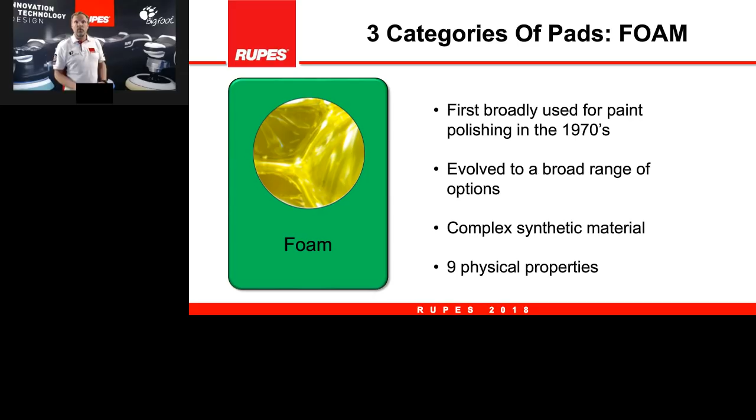In fact, these foam formulas that are used for polishing paint have 9 physical properties. These properties don't always apply to other uses of foam, for example, seat cushions and filters and things like that. But for technical polishing foams, there are about 9 physical properties that make up the formula. Those 9 properties are on your screen now, and we'll go through these real quickly.

The first one is porosity, and that is the little air bubbles, the cells in the foam, and that is porosity. Pores per inch is a unit of measure for foam, and that is literally counting cells in a certain area. So porosity can be more or less in these foam formulas. Next is density, and that's how many of these cells exist in a certain area, and how thick those cell walls are. Next is tear resistance, and this is the ability of the foam formula to withstand a stretch.

So it's an industry test actually on foam, very, very standardized test, but it's a way of stretching foam and then understanding the tear point when it begins to tear. We also have elasticity, and that's obviously how stretchy, how much the foam stretches out. And then also stiffness, so that's how stiff the foam is.

And then there's a property called load deflection. Load deflection is the force at which, when you compress foam, the foam pushes back. That is called load deflection. And there's several different industry tests for that in foam.

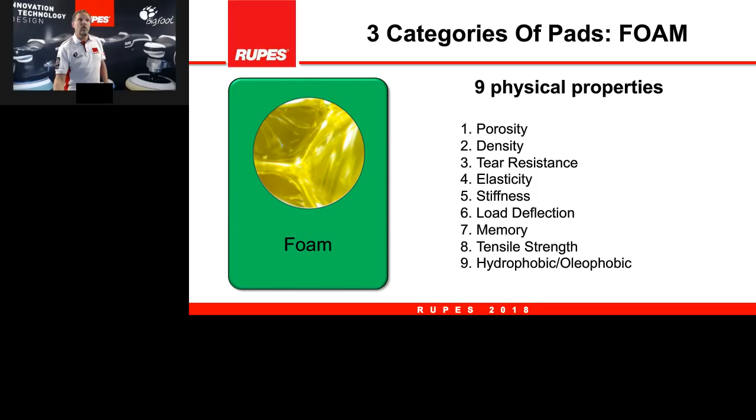So with that, we will go on to what happens on the surface. So when we use a polishing pad and we put it to paint, what is going on in between the foam and the paint? Well, the first thing is that the way the foam is structured, we have this pushing and pulling of the abrasives across the paint surface. And that is because the abrasives get into the cells and they hold there, and then they get pushed around on the surface.

So fluids actually go through foam in a hydraulic motion. And basically what that means is when you compress foam, the fluids that are in your compound and polish can actually get pushed through from one cell to the next cell. So when you compress foam and there's fluid on here, it will get pushed through those cells. And then also when you release, there's a hydraulic effect and the fluids move through the cells.

So foam has a surface area like all these polishing materials do, and the surface area is generally less on a foam pad than it would be on microfiber, but foam would be slightly more than wool. And what we mean by surface area is the actual touch points of the pad material to the paint surface. So this is what we call surface area, the surface contact of the pad to the paint surface.

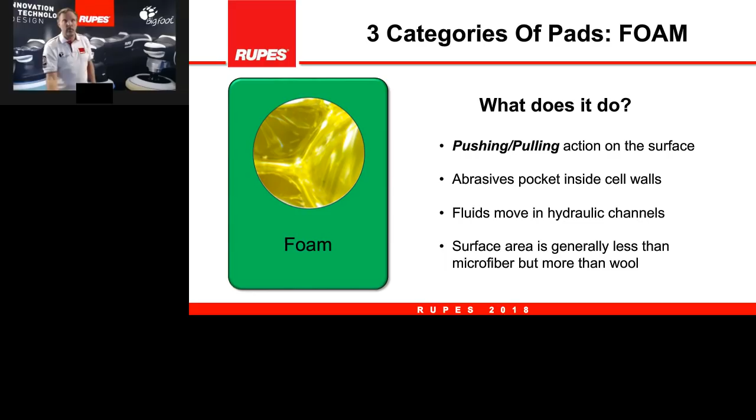So with that, we want to talk about this other property in foam, and that is called reticulation. The common words used are open and closed cell. So that means the cell walls are either completely intact and closed, or the reticulation process actually blows out one of those cell walls in every cell, and that opens up that cell. So that is called open cell foam.

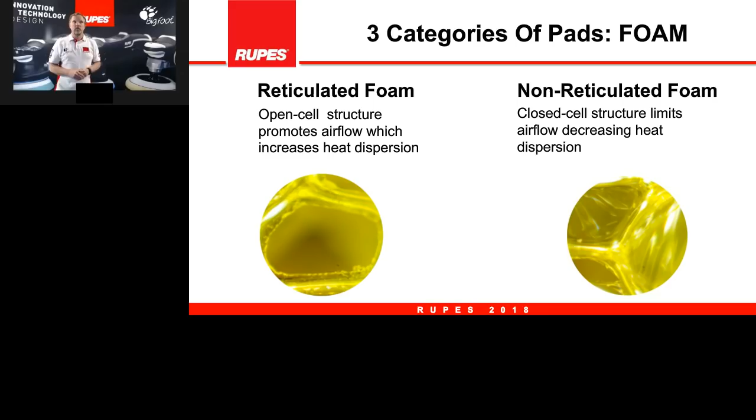And in the RUPES product line, all of the foams we use purposely are open cell foams. And one of the main reasons is this characteristic about airflow. So with open cell foams, you have this ability to allow air to migrate in and out of those cells more freely. And the closed cell foams tend to restrict that flow a little bit. And that means that the temperature could be higher in those pads. And with our tools, with the movements we have, we just chose open cell foams.

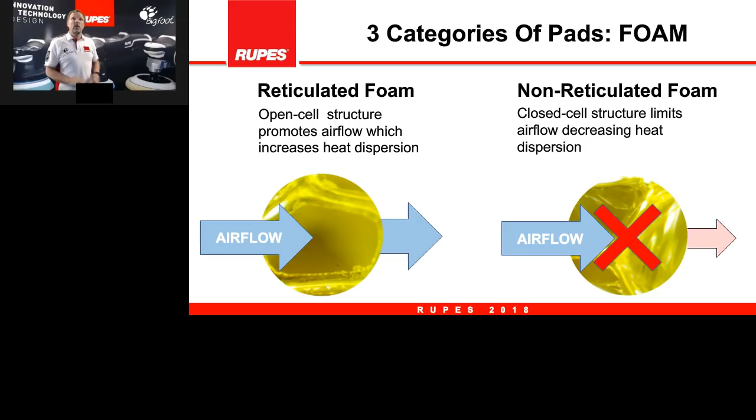So in our product line, we have 4 different levels of foam. And this is in our BigFoot Random Orbital product line. And these 4 levels represent different levels of aggressiveness and different levels of finishing for the foam. And there is blue, green, yellow, and white colored. And those colors correspond to the different levels of foam that we have.

One of the other physical properties that we have put into our foam pad products is this concept that we call lateral stability. So the lateral stability is the ability of that foam to maintain its structure with a side-to-side motion. And some of these traditional foams, perhaps the foams that were made for Rotary, the other foams that are on the market, they may not have this lateral stability built into the product.

And if that is the case, that foam pad on our tools could possibly generate more heat because a lot of the energy of the tool gets lost in the movement going side to side in an orbital movement.

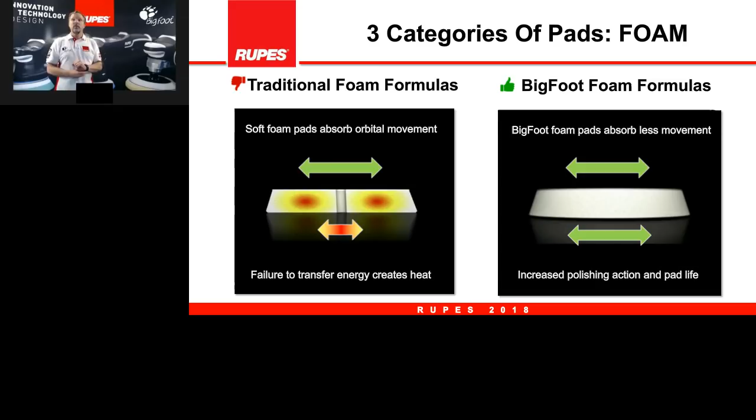The next thing we want to say about foam is that foams can absorb compound and polish, and sometimes too much. As users, we want to be mindful of this, what we call saturation. We want to make sure the foam pad does not get saturated too deep into the foam with compound, because especially on the random orbital tools, as they move with their large orbit, that heavily saturated compound in the pad could actually throw off the balancing movement of the tool. It can generate more internal heat inside the foam, and it could also create more pad drag on the surface because of that heavily loaded compound on the pad.

So the message here is pay attention to saturation. Make sure that you're not hosing on too much compound on the pads as you use them, because this saturation is not your friend. It's not helping you with performance.

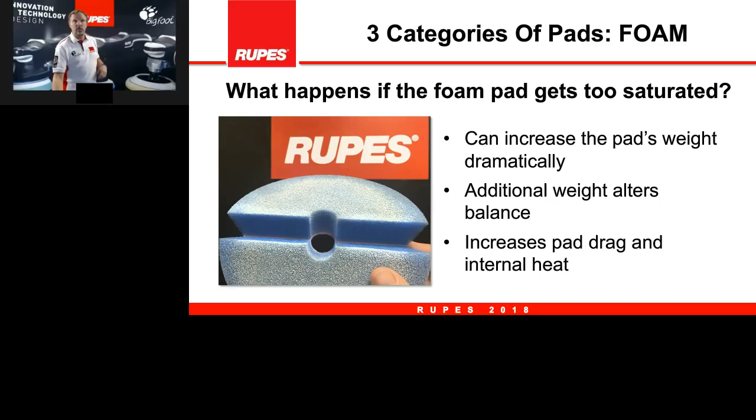And good for you that RUPES, in our tool design, in our movements, in our foam, and in our compounds, we've done everything we could to try and mitigate this saturation from happening, so it's actually part of our system.

The other thing we could say about our foams is that we have 3 complete different foam pad systems. There is the foam pads that are in our random orbital system, which many of you are familiar with. Then we have the foam pads that are in the Mille gear-driven orbital system, and you'll notice those are actually a completely different shape, with a completely different design. As well, the rotary foam pads are yet a 3rd new design.

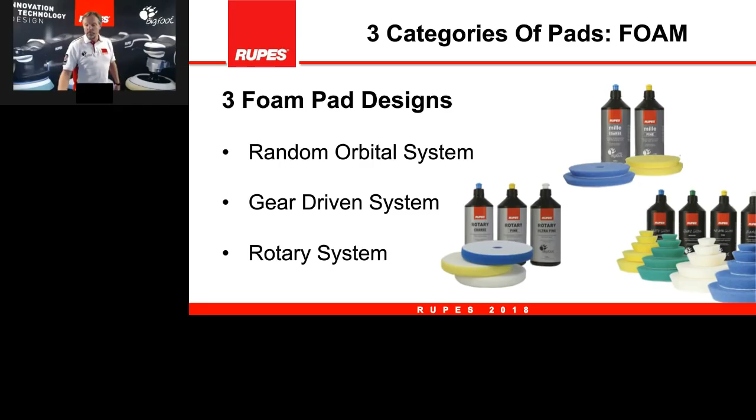These pads, if you put them all 3 side by side, they visually appear similar in the foam type, but the reality is that they have a different design, a different shape, and potentially different actual foam formulas based on these different movements and these different tools. So it's not just one foam fits all. We have different foam formulas for different tools and even different purposes.

With that, we want to talk about priming foam pads, and the recommendation here is to put 1 to 6 pea-sized dots of compound on the pad. We say 1 to 6 because it really depends on the pad diameter: 1 to 2 dots for the small foams, and maybe up to 4 or 5 pea-sized dots of compound for the 7-inch foam pad for the 21 millimeter tools.

So you put that amount of compound down, you put the pad to paint, and then you pull the trigger and run the tool at a low speed setting, like speed setting 2 or lower, but the point is a low speed setting, and you run it stationary in one place for about 30 seconds. The purpose of this 30 seconds of stationary running of the tool is to warm up the foam and warm up the compound.

With that, it allows the compound to spread more easily across the foam surface, and it actually activates your suspension system in the foam. So once it warms up, it won't be as stiff and it can actually suspend. This priming is important that you do this first before you begin your applications on the car, because you'll get better performance that way.

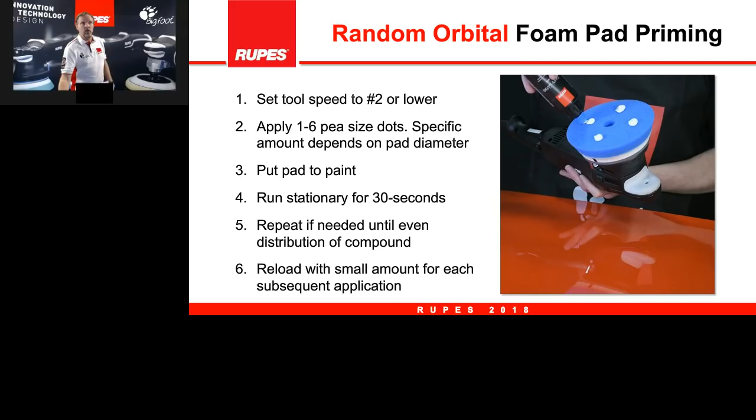Next, priming the foam pads for the Miele gear-driven polishing system. It's a little bit different on these pads. We are recommending you put a bead of product in an X pattern on the foam pad instead of pea-sized dots. Now, why not the dots? Well, if you put pea-sized dots on this tool with this particular predictable movement, the chances of it spreading and migrating throughout the whole pad, it will take a lot longer. So it's important that you get compound on the whole radius of the pad, because any dry parts of the pad with this system is going to cause pad drag.

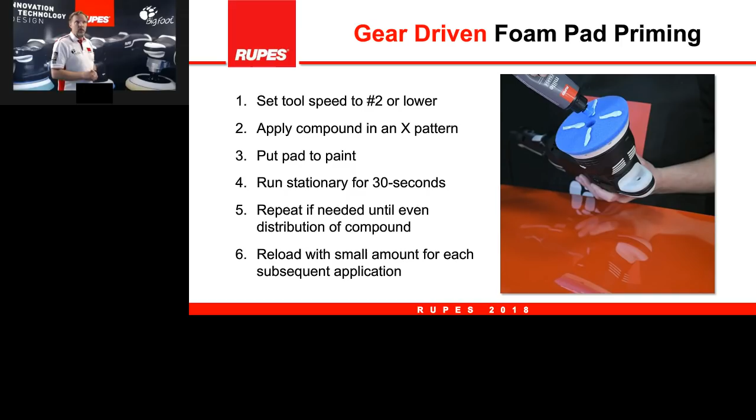So we put an X of compound, put the pad to paint, run the tool for 30 seconds in a stationary position, and that will prime the pads for the Mille gear-driven system. Next, we will go into priming for rotary, and the rotary movement is a completely different movement than the gear-driven and the random orbital.

And if we did dots or X's with this rotational movement, what would happen is any product that we place on this pad, as soon as we pull the trigger, that product will get thrown across the room. So any product, especially on the outside of the pad, as we turn on that tool, it's just going to sling.

So we need to be creative about how to prime this pad without making a mess and slinging it all over the place. The way we do that is we call it picking up a bead. We put a line of compound on the paint surface, and that line will be about as long as the diameter of the pad that you're using. If it's a big pad or a small pad, whatever that diameter is, that's the length of the line of compound.

And then, very particular motion here, but you will go from your right to left. The reason is because the rotary will only go in one direction, it won't go the other way. So it has to be from your right to left. Otherwise, if you go from your left to right to pick up this bead, it will throw product away, but going from right to left, it will suck it down into the center of the pad. So this is how we do this.

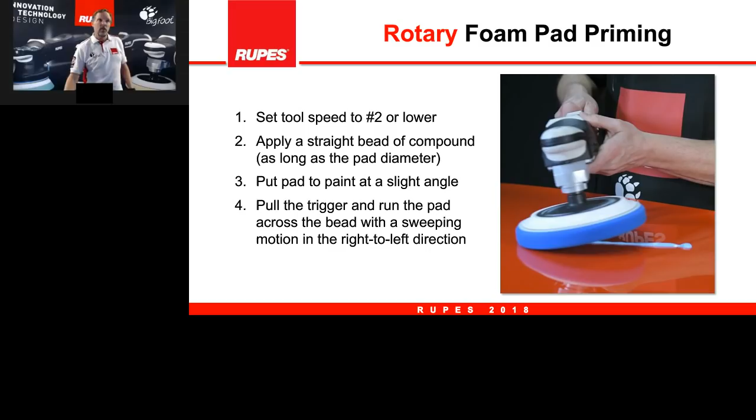We pull it across that bead, and then we lay the pad down flat and run the tool for about 15 seconds. The reload for rotary is the same. It's a very small amount of product, because once you're primed, you should be good to go. So 1, maybe 2 pea-sized dots to reload that pad after you're primed.

Cleaning foam pads, the recommendation is to use either compressed air or the RUPES BigFoot Claw pad cleaning brush, or a nylon bristle brush, some kind of a pad cleaning brush. Those are 2 very popular ways. The compressed air will be more efficient and more effective. So if you have the ability to do compressed air, that is really the best way to clean foam pads as you're working on the car.

So with that, we have discussed foam as a material category. That's the first of 3. I'm going to kick this over to Milan, Italy, and Fabrizio will talk about the next material, which is microfiber.

Yes, thank you, Jason. Thank you.

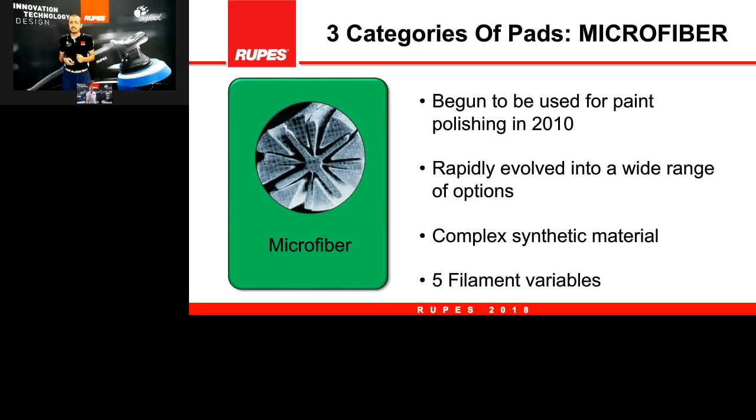So we have 5 possible variables that we can change, and these variables are the thickness of the microfiber. It's a microfiber, so for sure it's a very small thickness, but we can change it a little bit. The pile length, of course - we have a blue and a yellow, we will see it in a minute, with different pile length. We have a different ratio, polyester, polyamide - these are the 2 main components.

If you see in the picture, one of the 2 materials is polyester, the other one is polyamide. And changing this ratio, we can change the hydrophobicity or hydrophilicity. So we can change the behavior and the ability to take out water or grease or dirt. Number of vertical slits and strand density, so how many fibers we have in a square inch.

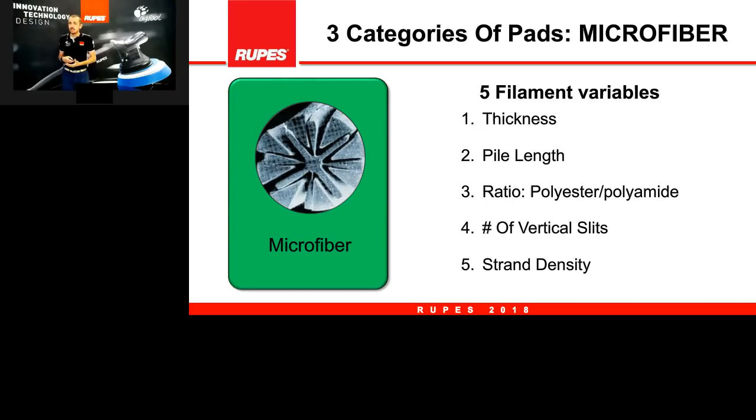Changing this, we can change the behavior of the microfiber, but what happens is that what the microfiber does on the surface is slicing. It just cuts out pieces of material from the surface. The abrasive will remain attached to the fiber. Fluids will hold on to fibers. So what we normally say is that it grabs and holds material from the surface.

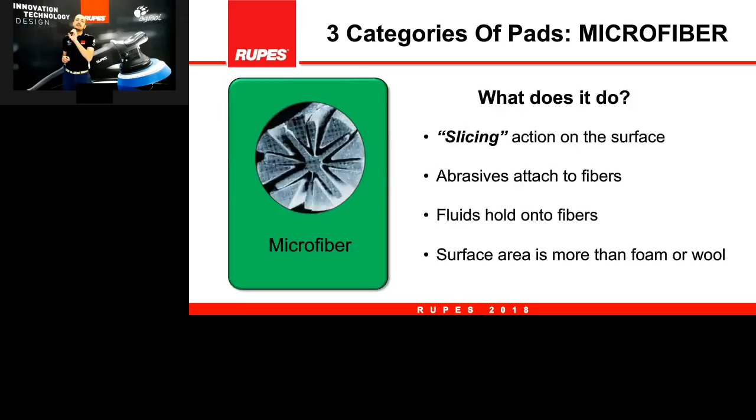The reason why this kind of material is more aggressive than foam is that the surface area working is higher. So we have a lot of surface in contact with the paint, and we can take out material quite fast, quite rapidly. So this is the mechanism, how it works.

While a normal natural fiber, can be wool, can be linen, can be any fiber, cotton for example, will just move dirt from one place to another one, microfiber will capture, will take it, will grab and hold this material. So it will just not be there on the surface anymore after that.

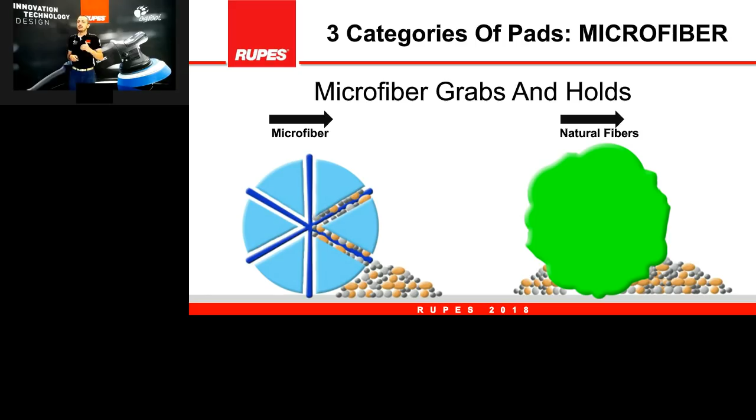It is a split fiber, meaning 70-80% polyester and 20-30% polyamide, and we can change this ratio. This gives us the possibility to change the features and the behavior of this material. It is a blended material, the blending of these two components.

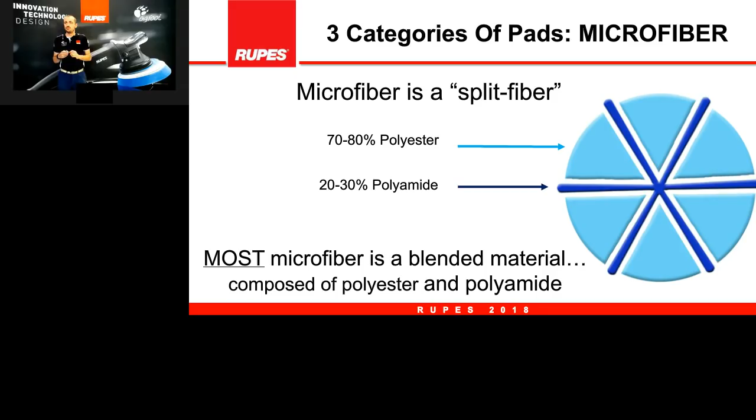What is interesting, and the reason why it appeared on the market only a few years ago, is that there is a high level of engineering behind the creation of microfiber. Look at this picture. On the left you see the thickness, an example of the ratio. The thickness of microfiber compared to the thickness of any regular natural fiber is the same ratio we have between a pencil and a big basketball, a regular basketball. So we have a material that is totally engineered and very advanced.

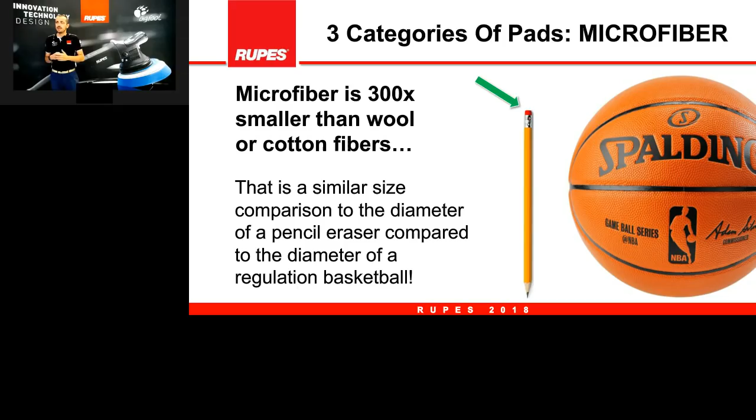This is the structure of the polyester, so this is the microfiber. We have the smaller filament, which is all connected to other filaments like them, giving a strand. These strands are bonded together to give a yarn, and this is knitted or woven to give the fabric. So in the end, what we have is a very complex structure, able to do a very peculiar job on the surface we are working on.

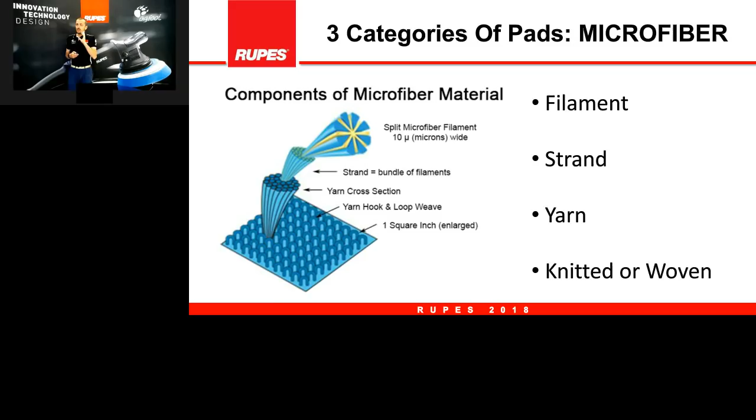So how do microfiber pads work? We have a dramatic increase of the surface, so a lot of material working on the surface, a lot of action, a lot of work, a lot of things happening between the microfiber pad and the paint or any other surface we are working on.

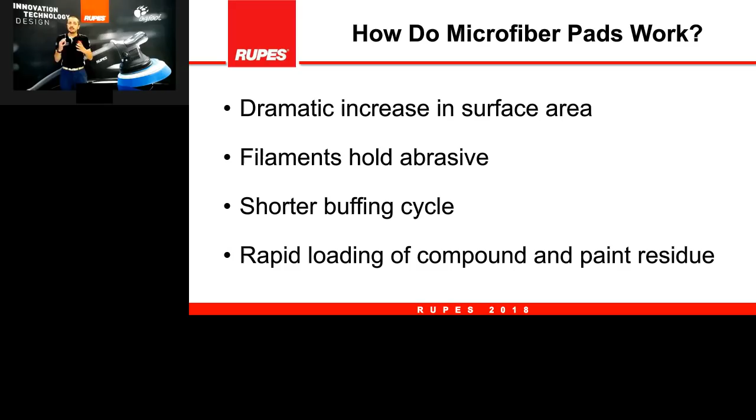The filament is going to hold the abrasive, and this abrasive will work on the surface. Of course this gives a little bit more heating, will increase the temperature of the job, and we will need to reload the material on the pad quite fast. These things make microfiber a quite aggressive material, but it needs some delicate operations, like cleaning the pad quite often and being careful on the temperature side.

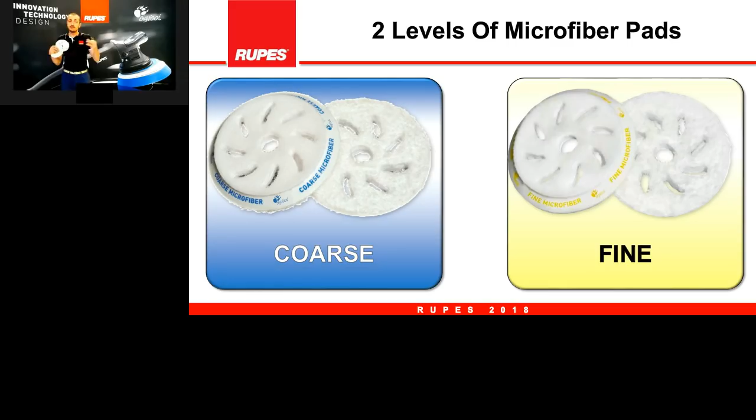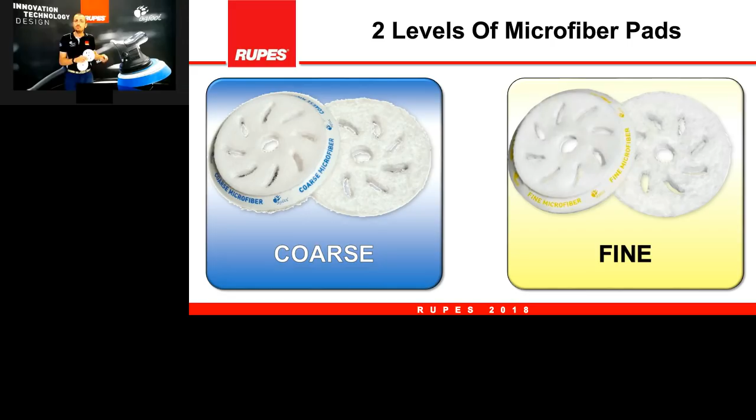We have two levels: a coarse and a fine pad. Same color on the front, but different colors on the back, so you can distinguish them by watching if it's blue or yellow on the side of the pad. The coarser is more aggressive, but many times needs a second step, especially if used with blue compounds. Instead, the finer, especially if used with yellow compound, will cut a little less but will have a dramatically better finish, gloss, okay? Consistent color code, always for RUPES: blue, more aggressive; yellow, better finish.

The polyurethane - this is manufactured here in Vermezzo. We have in-house production of these microfiber pads. There's no glue to keep together Velcro and microfiber; it's just polyurethane that binds chemically the three layers together. We also have these slots in the middle to cool down the temperature when you're working. This is also a patented solution that will allow us to work for longer time with these pads.

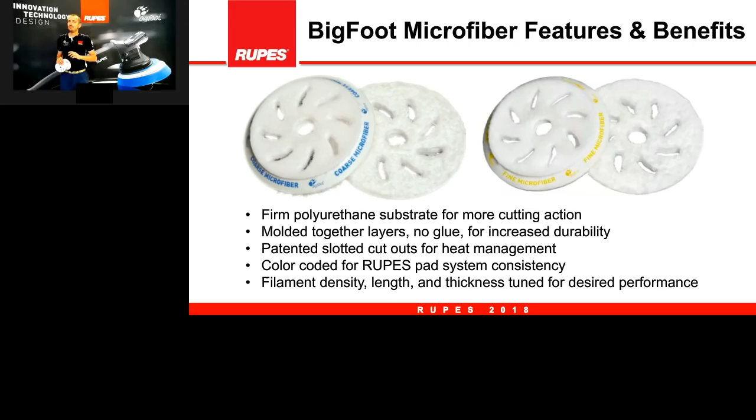How to prime the pad - this is different compared to foam pads. Foam pads have open cells, so the compound is able to move through the pad. This instead holds and grabs, so we must be sure that all the area of the pad is covered with compound to have a better user feeling and a better cutting, more homogeneous and consistent cutting from the pad.

So what we do is set it at a low speed, but make sure all the area is covered. We need a thorough dispersion of compound all through the surface of the pad, and then probably using a claw pad tool, we can make sure all the area is covered. Then work for 15 seconds, 10 to 20 seconds, just stationary or with small movements, and then reload if needed, and you are ready to go. The important thing, the same with all fiber pads, and the same with wool, is to make sure that all the area is covered with compound.

How to clean them? You can use a claw pad brush, you can blow with compressed air, and there's this Tornador system that works very well with fiber pads - probably you know the gun that rotates. So we strongly recommend using air and doing it often, because after a few minutes of working, microfiber will be completely loaded up with paint, residues and dust, so it must be cleaned often.

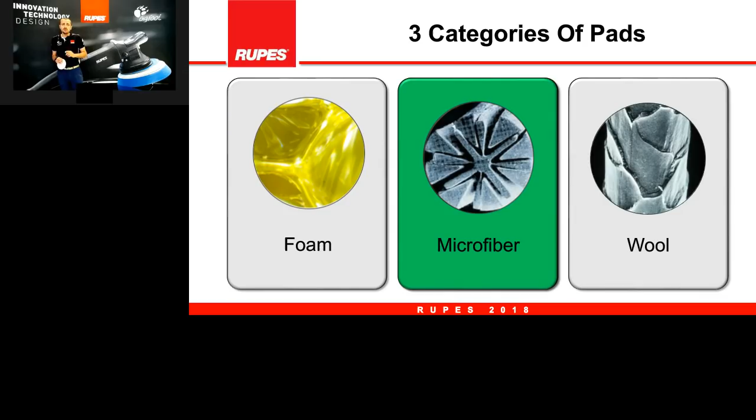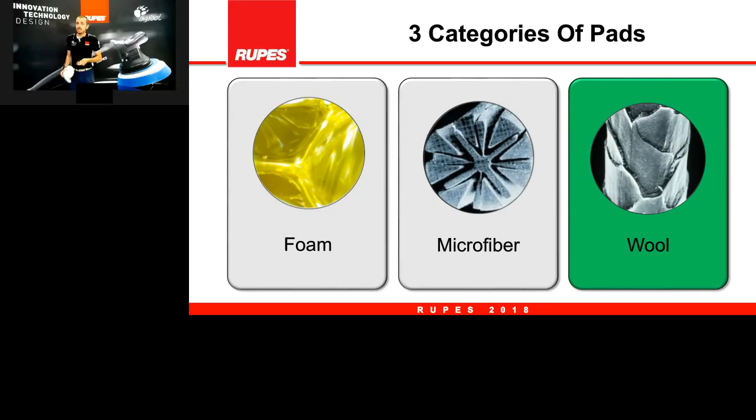The other solution that has been a major innovation in RUPES, in my opinion, and personally my favorite, is wool. Wool is not a new solution, it's the opposite of microfiber. It's the oldest one, it started in the 50s, but has been there continuously since then, with different solutions and a lot of technology still going on in this material. Mostly natural fibers, coming from sheep and animals, some are synthetic, man-made, just like microfiber, but we think the best one is natural, and that's what we use for our wool pad.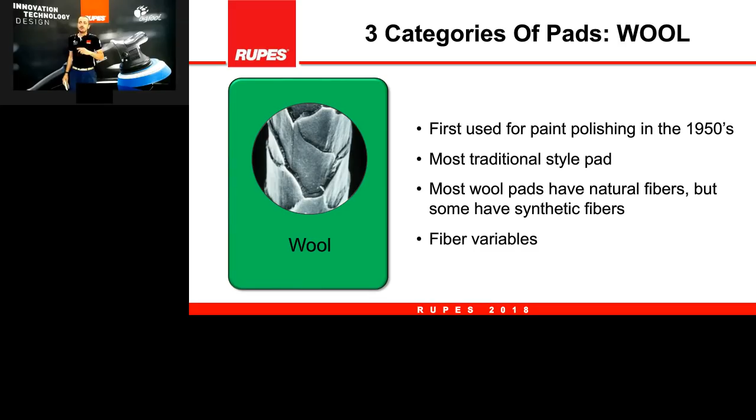Some variables we can introduce about fiber are the material, synthetic or natural, and we'll see some examples of different materials used in wool pads. The blend of material, we can blend different pile length, different thickness of the strand, twisted or untwisted, different densities, so different number of fibers per square inch, and the kind of substrate. We use this one with a foam substrate, but there are different others, let's see some more examples.

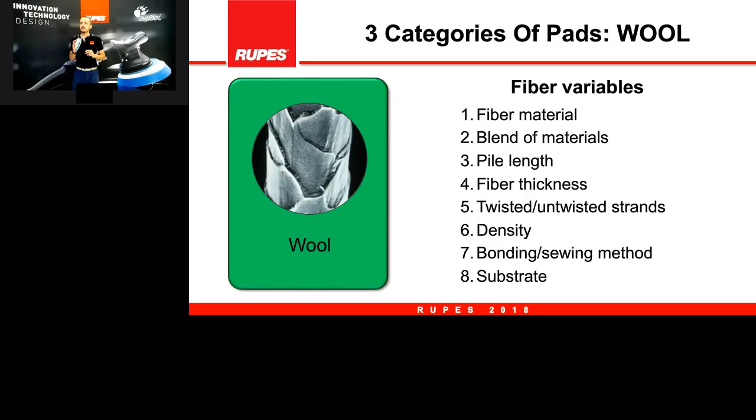So what's the kind of action that the wool fiber does on the material? It's scraping, so we are rubbing material out from the surface, because these strands, especially if natural, have a strong abrasive action, so they really rub onto the surface. Fluids are semi-absorbent, so they might be absorbed, that's why we suggest to thoroughly prime the wool pad. And normally we have less surface area than microfiber and foam, but still quite a lot, so we need to be careful about overheating the paint.

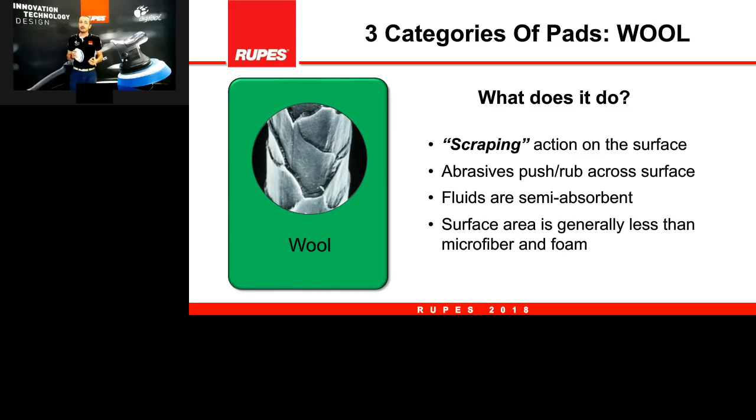These are some examples. We might have coarse and fine fibers. We can have finer ones, silk, which is not really common but some pads on the market use silk or linen, and polyester. You see the difference between natural wool and artificial polyester - polyester has a very flat surface, so it's smoother, less aggressive. That's why we decided on wool pads, since wool is normally used for aggression, to cut, and natural wool is more aggressive and does a better job.

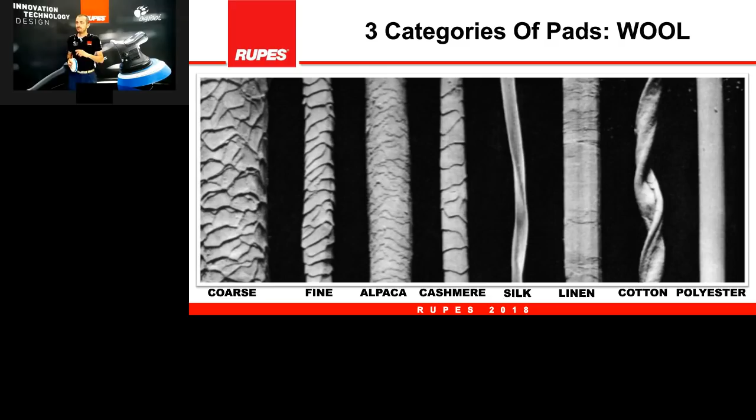Then we also have different categories, different geometries of the pads. We can have the dish style, which is quite common in the US but also now all over the world - it's probably the most aggressive kind. Then we have the tufted, which can be used on both sides of the pad. We have the Euro one, which is a simple substrate with some wool fibers attached. And we have the Asian one, that is the kind of technology we adopted for these pads, because they are the best performing with dual action machines.

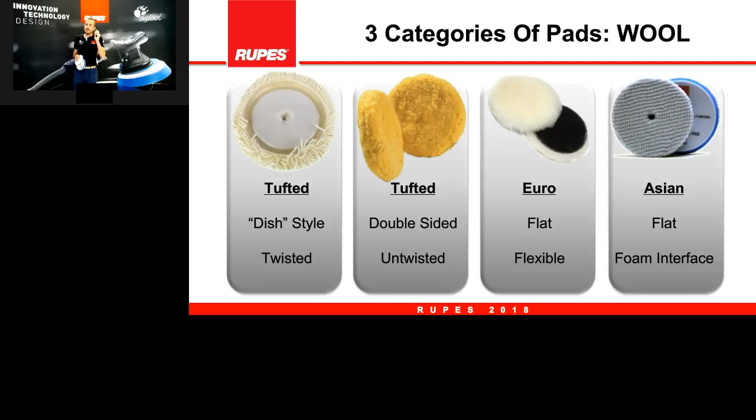So these have been specifically designed for dual action machines. We have two levels, coarse blue and yellow fine, both dedicated to gear-driven or random orbital movements. What changes between the two materials? It's engineered for our three systems that have dual action - gear-driven, triple action, or random orbital. We do not suggest to use them with rotary, although a lot of people use it and say it's good, but we suggest these two pads for dual action machines.

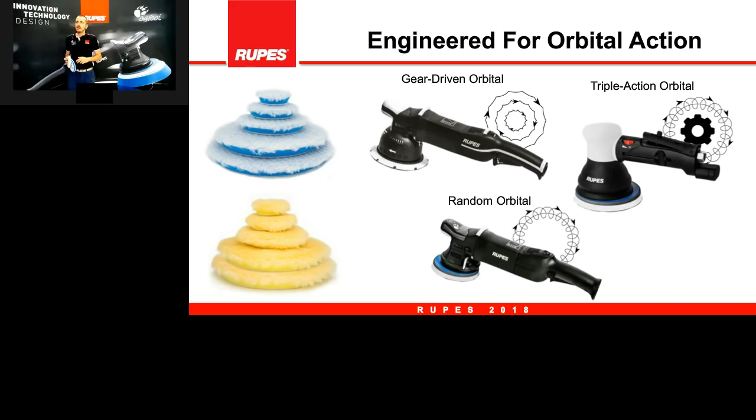The difference between the two pads: the blue one has a dual fiber density. We have two different fibers, two different lengths, 5 and 8 millimeters, so it's a dual fiber density. We have a quite stiff blue foam backing the action of the wool, giving the fastest defect removal. We have all the measures - while for microfiber we only have 75, 125, and 150 millimeters, for this we can have from 40 to 170 millimeter pads, so also the nano, the very small one. So if you need to take out deep scratches or deep sanding grits, you can do it with a nano.

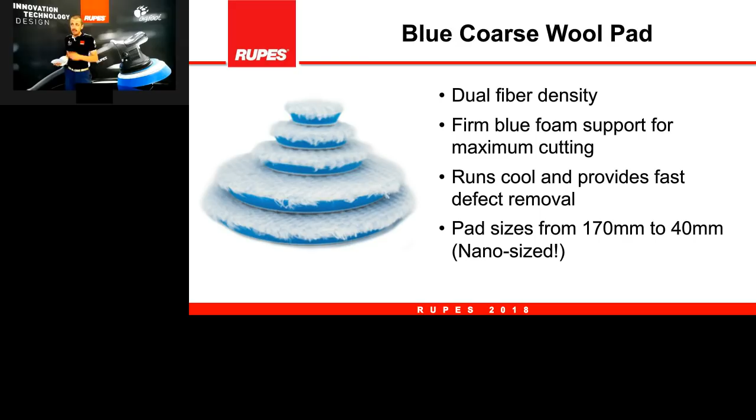Then we have the yellow one, which has a longer fiber - 15 millimeters - and it is very good for finishing. So while the blue one usually requests a second step, this one, especially if used with yellow compound, can be a one-step job. Good cutting, but also very good finish.

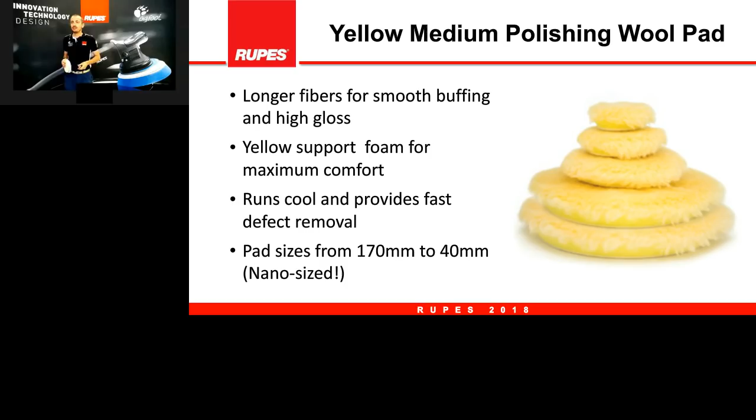How to prime it? Quite similar to the microfiber. Since this tends to absorb some compound, we again suggest applying a thorough quantity of compound all through the surface, and do not leave any dry area, because it will give you a bad feeling when you're working it. So if you want the best user feeling and comfort, a good priming process is requested.

How do you clean it? Just like microfiber, you blow it with compressed air or use a claw tool. For me, the best option is compressed air, but if you don't have a compressor, or if you're mobile and don't have access to compressed air, you can easily use our claw tool. It will give you a very good result.

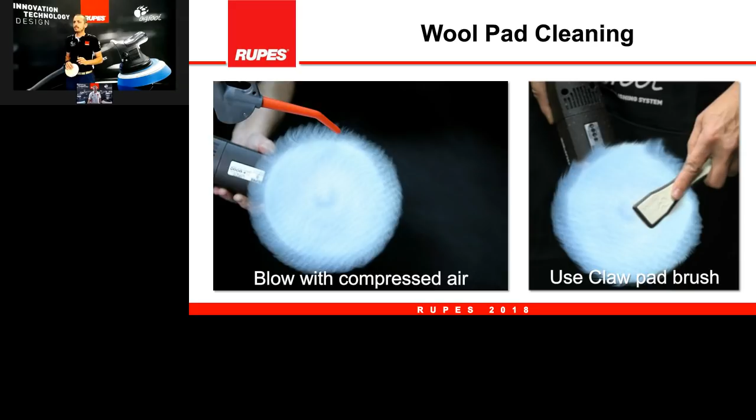What we will do now is transition from talking about the actual materials themselves to comparing the relative performance of using these polishing pad materials for different purposes. We will go through some charts and compare performance. As we do this, we'll be using this color code scheme to compare relative performance as a quick and easy way. These charts can be downloaded in the resource box on your console.

When we think of general performance when polishing paint with these different materials, we want to look at things like defect removal speed, how fast the material removes defects, as well as how well that material finishes on the paint. In other words, removing defects but leaving the paint defect-free. Also the user experience, because these different materials can have a different feel to the surface, and the smoothness and how it applies to the paint can be very different from material to material.

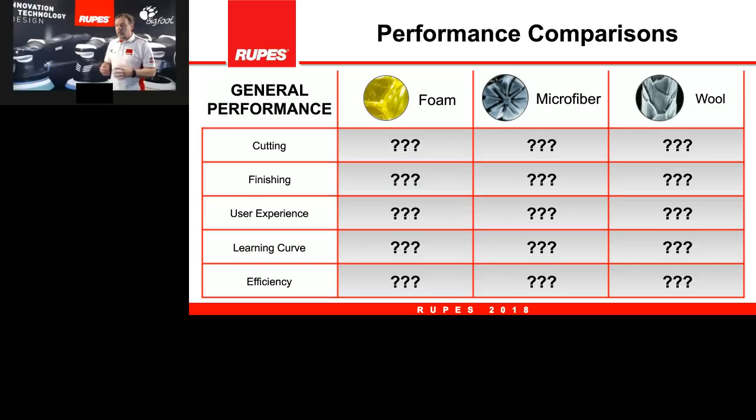Also the learning curve—how long it takes to master using this material as a polishing medium—as well as efficiency. With efficiency, we're talking about time and steps, and with these materials, depending on the procedure we're doing, it could mean more or less time or steps.

So let's look at this. We will look at cutting ability between these three polishing materials within the RUPES pad systems. We will give the gold stars to the microfiber material. If you look at just raw cutting power and removing defects, the microfiber will be the clear winner. However, if you look at the number of stars, the gap in performance between microfiber and wool, and microfiber and foam, is not that big. They all remove defects, they all do cutting power, so the gap is not very large, but there's a slight edge to microfiber.

Secondly, finishing ability. If we look at these materials, we clearly give the gold stars to foam. Consistency over time, different paints, different climates, different severity of defects—all things considered, the foam material will leave you the best consistent finish relative to the other materials. That will be followed by wool and then microfiber.

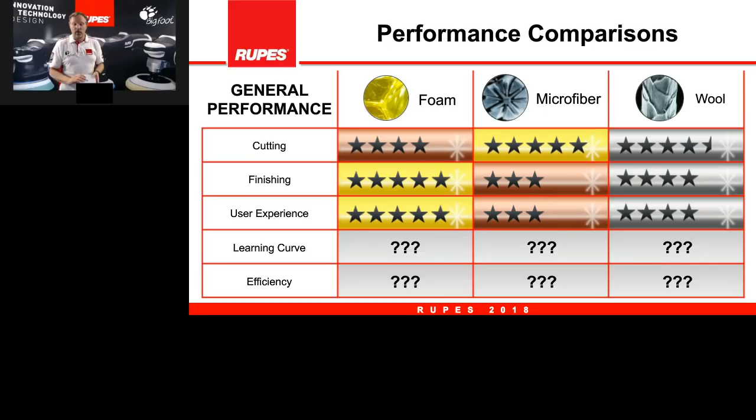With user experience, when we're talking about smoothness, pad drag, things like this, foam is very, very smooth on most paint surfaces, so that gets the gold stars. Remarkable too is our new DA wool pads, our dual action orbital wool pads. Once these are primed sufficiently, they are actually very, very smooth on the paint, so that's another good option for user experience.

Then on the learning curve—how long it might take the average user to really master these different materials—we'll give the gold stars to foam again. All things considered, if you're trying to learn how to master and get the best performance of these materials, you can get there faster with foam. Our wool pads are actually pretty easy to use too. The microfiber, however, which we'll talk about in another slide, has some dependency on proper priming, proper cleaning, and proper technique, and that is part of the learning curve with microfiber.

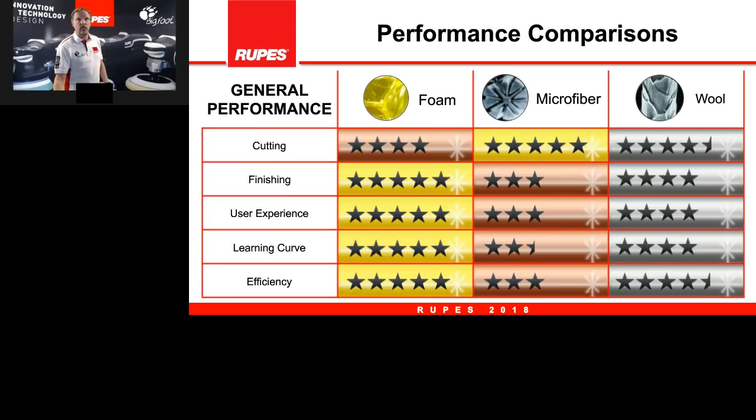Next would be efficiency, and this is literally how much time and steps are involved with these types of materials. Again, we'll give the gold stars to foam, because all things considered, with most levels of defects and most types of paint, the foam material can get the job done very efficiently and quickly, followed by wool. Our new wool pads are fantastic for that. The next chart I'll show you, and we're going to get into two charts about refinish paint.

And what we're talking about here is freshly sprayed paint in the collision repair or the custom painting industry. Now, in that world, the paint condition can actually exist in three different ways. The first way we talk about is very, very fresh. We're talking within hours of being sprayed. And this could be very wet paint.

It could be over applied. So the painter accidentally hosed on too much clear, which is not a good paint condition. And then also under cured clear, which is paint that's not mixed properly or not force cured properly. So in this scenario, this paint condition, these materials perform differently, and we will give the gold stars to the foam because in this paint condition, very, very wet, very fresh, perhaps under cured, the foam pads will perform better.

Microfiber will simply be too aggressive, so we don't even recommend it for this paint condition. And then wool can sometimes perform well and sometimes work against you.

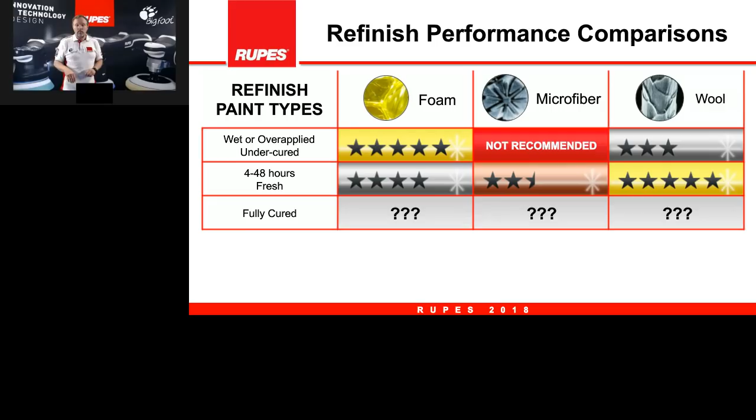Now, when the paint changes and it ages, and we're measuring this change in hours now, so freshly sprayed, 4 to 48 hours later, the solvents are outgassing, the paint is becoming harder, and the cross-linking, the curing process is advanced, and the paint is actually different. It has completely changed. So with this change in the paint condition, these materials will polish differently on that surface. So we will give the gold stars to our new wool pads in that scenario.

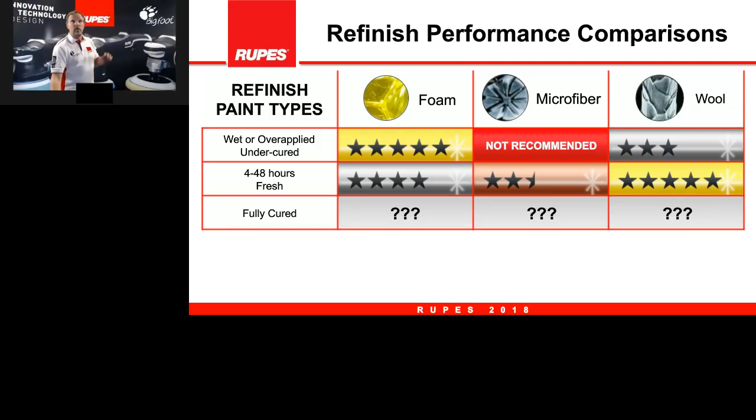So in this paint scenario of fresh paint but fully cross-linked cured, first day, second day, the wool pads, absolutely fantastic for removing sanding marks and removing defects. The foam pad will do pretty good. Microfiber will still suffer a little bit in this condition.

Now, going on beyond days and weeks and months, this fresh paint becomes fully dry, fully cured, all the solvents have outgassed, and the paint hardness has developed to whatever it's going to be, and the paint has settled into whatever condition the paint is going to be.

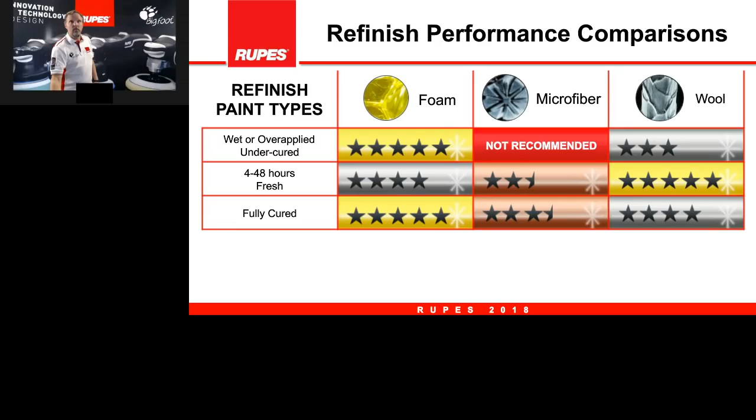With that, we'll move into another kind of paint that most of you are on almost every day, and that would be factory applied or OEM applied paint on factory built cars. So we again further divide this into other subcategories. So we categorize factory applied paint as standard, and then there's soft, and then there's hard OEM paint. And then we also add in gel coat, which is your boats and RVs, completely different material, but can also be factory applied. So we will go through these scenarios together.

With OEM standard, so this is most of the cars, most of the paint types that are applied at the factory, the best material would be the wool pad. And again, we're talking about the average or the standard hardness on factory applied paint. The new RUPES wool pads are phenomenal, and they can be used on either the gear-driven Mille tool or the random orbital tool on that factory applied paint.

Next, we have a paint condition, also factory applied. Generally speaking, this condition is in the Asian markets, but it is experienced elsewhere in the world. But this we call soft or sticky paint. Sticky paint is a condition where the paint, it's not wet, but it's so soft and the surface tension is so different than what it should be that any compounds actually absorb very, very quickly, and removing defects is a big, big challenge for this condition.

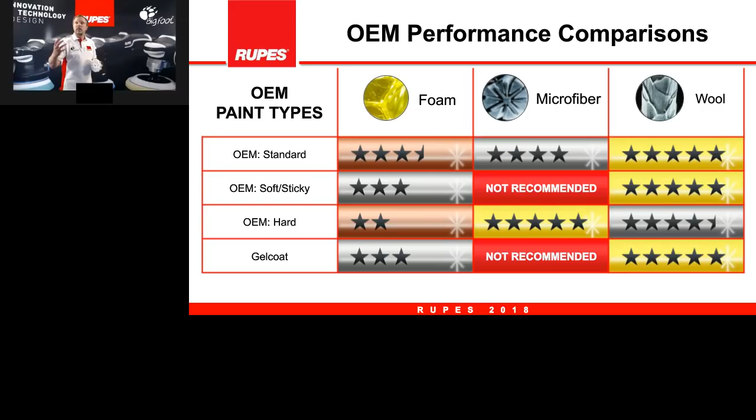The gel coat scenario, and this is a very, very porous, very hard, very thick surface, mostly on boats and RVs. We don't recommend microfiber because, as Fabrizio mentioned in his segment, microfiber will grab and hold things, including the oxidized residue from an oxidized gel coat surface. It will very quickly load onto the microfiber pad and make that pad not perform as well.

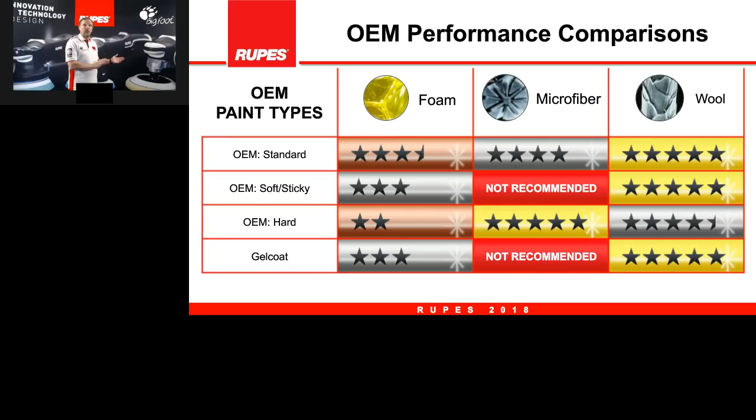So in that scenario, we recommend the RUPES TA wool pads, which is a great choice for oxidized gel coat. It will cut through that material and remove it from the surface. A good second step on gel coat would be switching movements, go to a random orbital movement and finish with foam. So that's a good tip on procedure.

Next, we have application comparisons, and this is what we're talking about in terms of user experience. How is it to use these different materials? And we have a thing called priming dependency. So these materials will perform good or bad depending on the quality of the priming that the user does. So with foam, it has the least dependency on priming because you can be sloppy about the priming perhaps because foam, with its hydraulic characteristic, will actually self-prime over a few applications. So priming is not as critical.

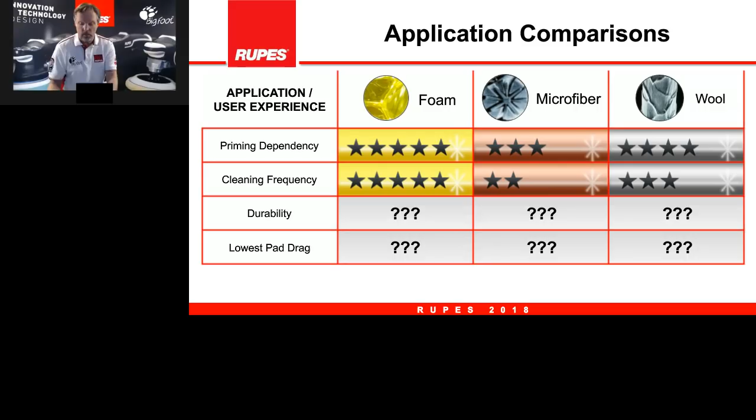However, with wool and microfiber, there is a strong dependency on priming because the product will simply not work as well if it's not primed properly. Next, we will go into the dependency for cleaning. The foam actually can go a further distance and be used for a longer period of time without having to clean the pad surface. But again, the fiber pads, microfiber and wool fibers, they need to be cleaned, especially microfiber. If you do not clean those pads as you go, you will lose performance. So the frequency of cleaning is actually more with fiber pads.

And we talk about durability of these materials over time as you're polishing, and we will give the gold stars to the microfiber material as being the most durable under those conditions where they're being heavily used. And then that would be followed by the wool and then foam.

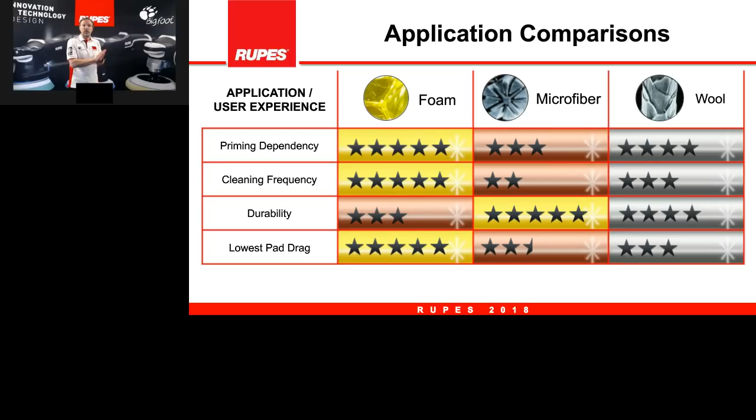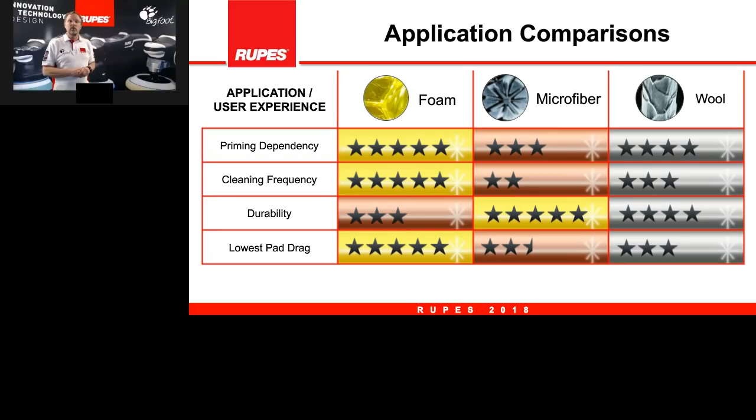Now this characteristic we call pad drag has to do with surface area and the footprint of that surface area on the paint. So foam, with its cell structure and all the little air bubbles on there, would have, generally speaking, the least amount of pad drag, whereas microfiber with the most surface area would obviously have the most pad drag. And that means you could be fighting the pad, you could be losing rotation a little bit with random orbitals, but that is a function of that pad drag. And again, if I'm going too fast, these charts you can download in that resource box.

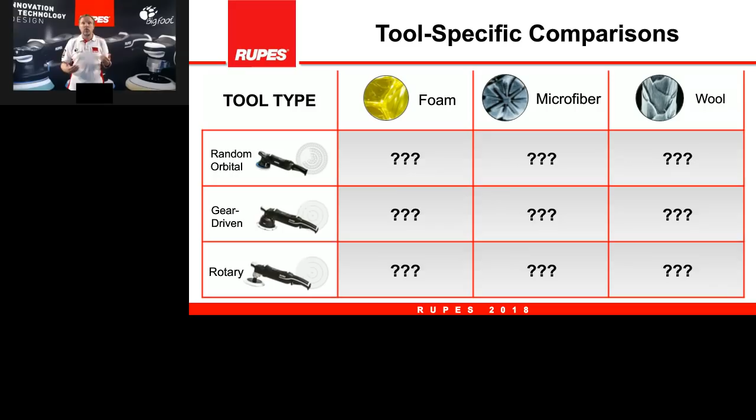So here's another way of looking at these materials, and this is looking at them from the perspective of what tool you're using with the pad. So we're not going to compare using our color scheme, but we will have some general comments to make. With our BigFoot random orbital system, with these three different materials, with foam we can expect, generally speaking, the best all-around performance with the random orbital.

And with microfiber, you can actually get better performance with random orbitals on hard paint. So that is where it really performs well, when you're on those harder paint systems. And then wool has absolutely outstanding cut and finish, and you get the best of both worlds with these wool pads on a random orbital. It's absolutely fantastic performance.

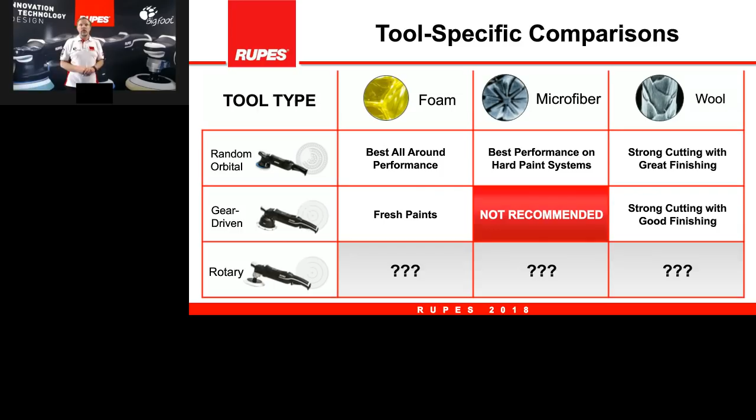Then with gear driven, if you look at these materials in the polishing products, you can see a big red box. We do not recommend the microfiber pads on the gear driven movement. And there's a lot of reasons for that, but the main one is that it ramps up temperature way too fast with this movement, so we don't recommend microfiber.

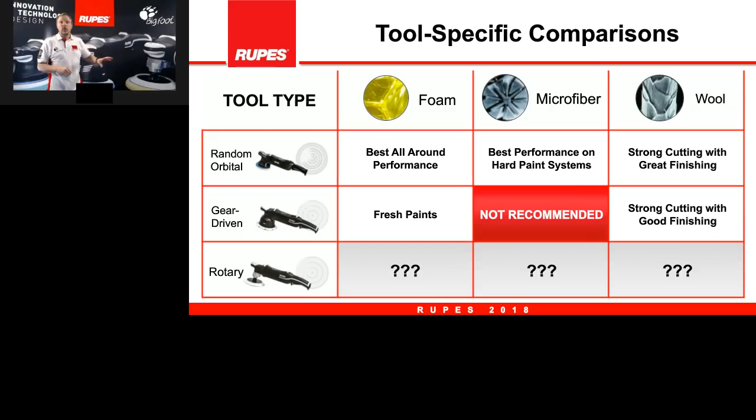But on the gear-driven tool, foam is outstanding on fresh paint scenarios. It does really, really well. And then the gear-driven tool with wool pads, you get the benefit of that strong cut and that strong finish with that gear-driven movement.

Now the Rotary, you'll notice we also do not recommend microfiber pads with the Rotary system. Again, the temperature ramps up way too fast, and the fiber is actually way too small, and it creates a pattern on the paint that we don't like, so we don't recommend it on Rotary.

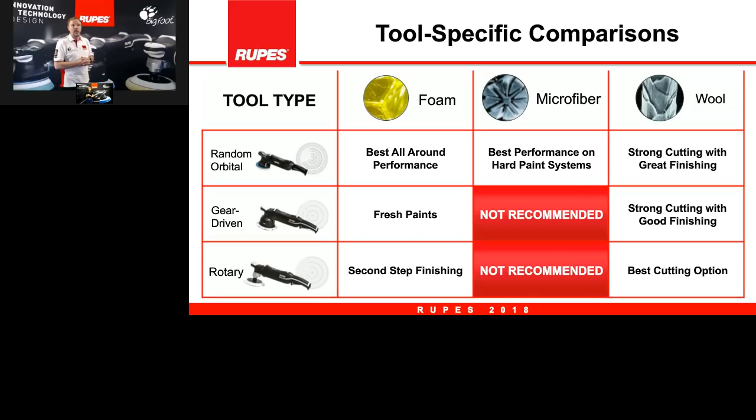However, with the Rotary system, the foam pads do a great second step finishing on any severe defect removal procedure. And then wool pads will do your best cutting of a sanding mark and severe defects. Our new DA wool pads are not recommended for Rotary, but we will very soon have a wool pad product specifically for the Rotary system.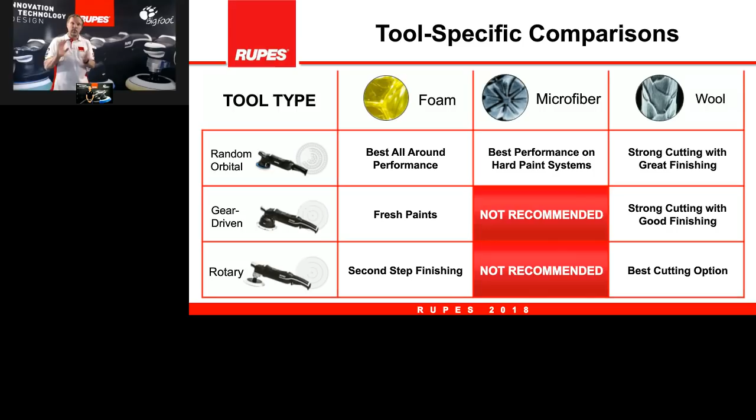So with that, I'm going to switch this back over to Milan, Italy, to Fabrizio. What I've done is looked at some general performance comparisons using these different polishing materials. What Fabrizio is going to do for you now is look at some very specific challenges, some problems, and how these materials can help you get out of a problem, and which material would perform best in certain situations. So we'll turn it over to Fabrizio.

Thank you, Jason. These next few slides I think are very interesting, so I kindly recommend to just follow what I'm going to say, and it is also answering some of the questions that in the meantime arrived. When should I use one? When should I use the other? Jason did it, let's say, more on the theoretical side. I will do it with some practical examples. So let's start with one real condition that you can find when you just do your job, whether it is detailing, whether you work on cars or other materials. Now, there are some good examples.

So let's suppose you're working on a car with 12 hours old, so quite fresh paint, properly applied. You want to remove sanding marks, 2,000 grit, so quite deep, big scratches made by the paper. Which pad material would likely give you the best result? Now there are a couple of elements that you have to consider. It's a fresh paint, but it's properly applied and properly cured, so it's not soft, it's not sticky, it's quite hard but fresh. And you have 2,000 grit, not 3,000, not 5 or 6,000.

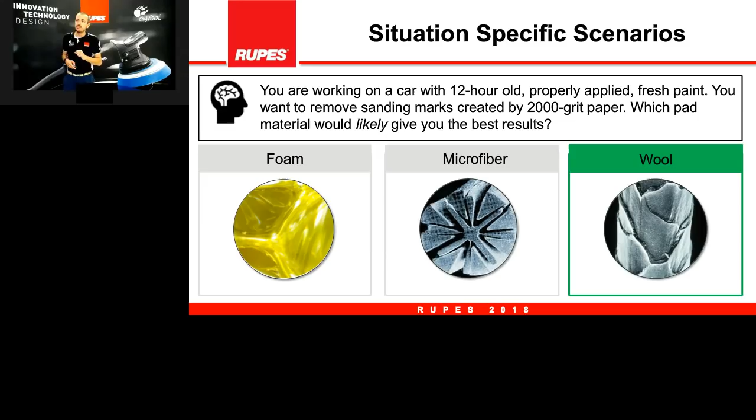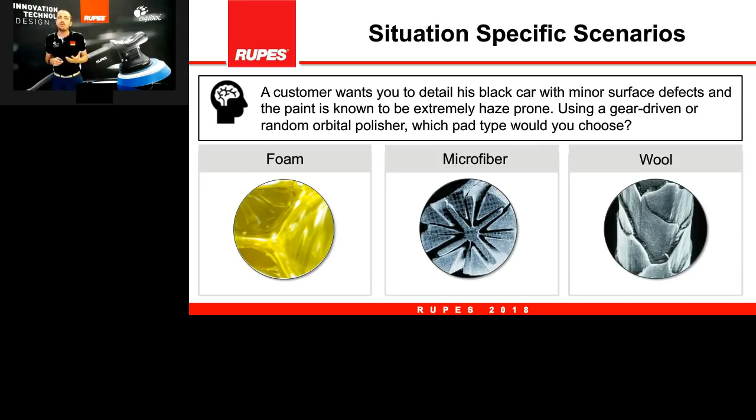Let's see another example. A customer wants you to detail his black car, so we have a black, which is always the most difficult to deal with minor defects on the surface, and the paint is known to be extremely haze prone, so it is delicate, and with too much aggressive action it will become too bad. Using a gear-driven or a random orbital polisher, which pad type would you choose? Of course, we cannot stand on the aggressive side. It's better to choose a combination which is a little bit more delicate, more gentle on the surface, and foam is the right material in this case.

You're asked to detail a heavily oxidized boat. Boat normally means gel coat many times. And you have a gear-driven orbital polisher. That's what you can use. That's what you have with you. Which pad would be the most effective choice? Now, it's heavily oxidized, means it's in a bad situation, but we cannot use microfiber. Jason told that microfiber is not suggested for oxidized gel coat, because after a few seconds it will not work anymore because it will be completely stuffed with oxidation. So foam would take too long. What we suggest in this case is wool.

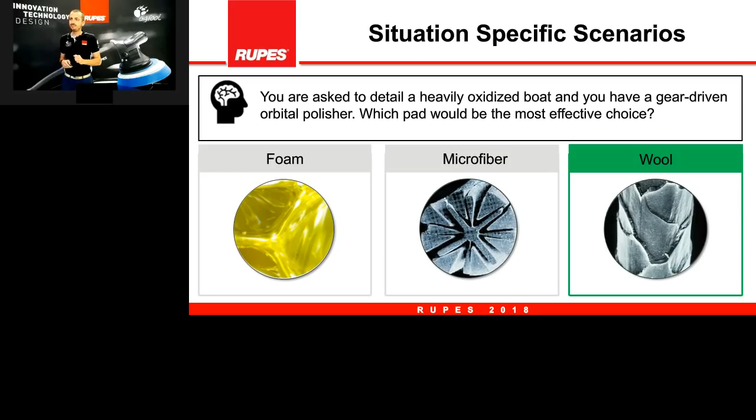The car you're working on has very hard OEM scratch-resistant paint, so it's probably a German car with hard OEM scratch-resistant paint, ceramic coating, ceramic paint, something like that, with severe defects. You only have your random orbital polisher with you, so you cannot do the first pass with Rotary or any other. You must use a random orbital. Which pad type would you choose?

We are on a very hard paint, we are with severe defects. That's the best possible condition for using a microfiber pad. Foam might work, but it might take too long. Wool will work better than foam, but it might take too long as well. Microfiber will be the fastest and easiest solution to use in these conditions.

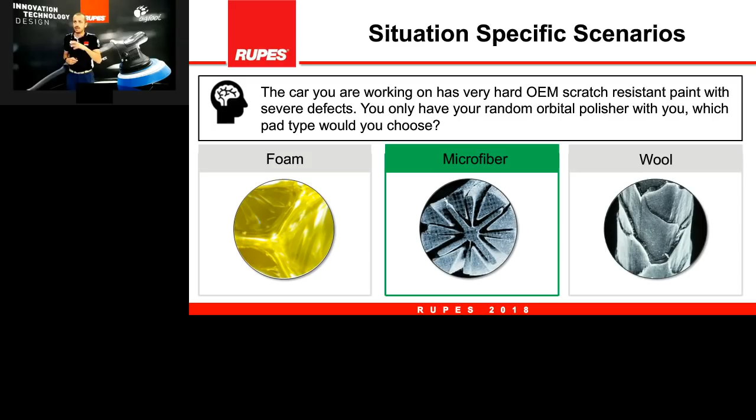You're polishing a car with thin paint, and you want to minimize material removal. You want to be gentle. You don't want to burn through the paint. You don't want then to go to the body shop, to the painter, and repaint the car. Which pad type would you use?

Which would you choose for the job? Foam is the fastest solution for doing this job. No, not the fastest - the most delicate and the safest solution.

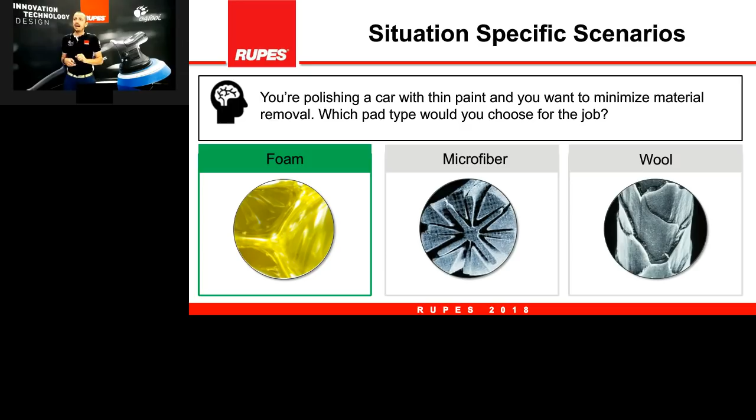You're running a high-volume detail shop. You have to do many cars every day, 2-3 hours each, specialized in fleet work, so not too long jobs. You need to define a system for your employees using a Rotary polisher. You have to be fast, with Rotary polishers that will give a consistent result for all of them. You have many people working, so you need to always have the same result.

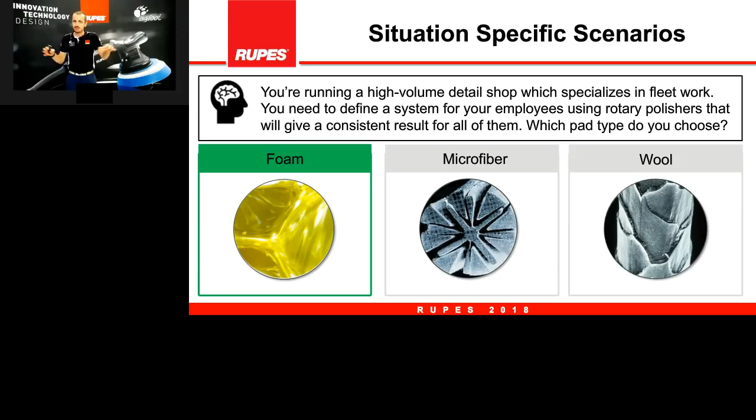Which pad type do you use? Which one is the least dependent on technique? This is foam. Foam will depend less on technique and will give the same result, or the most similar result, for all the people working.

Your shop lands a fleet account for a dealership. You need a fast and easy-to-use solution with your gear-driven polisher to remove the most defects in as little time as possible. What pad do you choose?

In this case, we must use a gear-driven polisher. Again, we have to do a quite fast job, but since we're using gear-driven, it's less technique-dependent than Rotary. We might go to the wool side for this job. Okay, these were some examples on when to use the different materials.

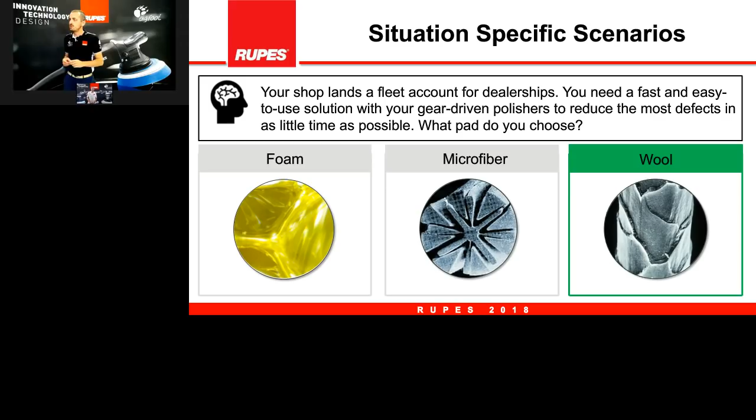That's very interesting, going through those individual scenarios and which type of pad material is the better solution. So what we want to show you now is this chart, which again is available in the resource box - you can download this now or later. This chart looks pretty crazy on the slide, but I'll explain it.

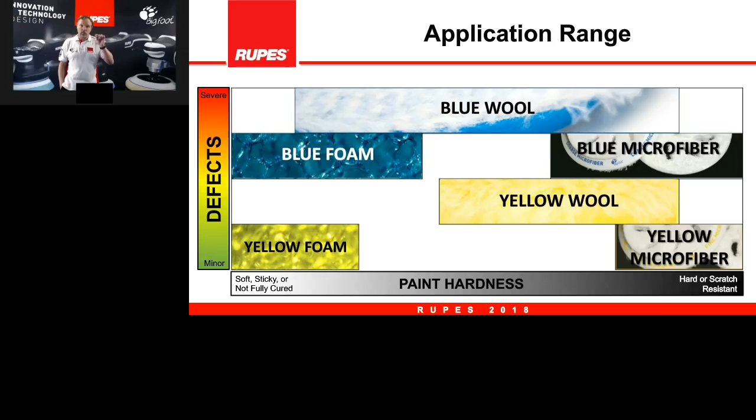On the left axis is the severity of the defect. On the bottom left is mild or small defects, and on the top of the axis is severe or heavy defects. Across the bottom of this chart is your paint hardness scale - on the left is soft paint, on the right is very hard paint. So paint hardness across the bottom, severity of defects on the left.

In the middle you will see pad recommendations for cross-reference. For example, very hard paint with lots of defects would be in the upper right-hand corner of this chart, and that would be our fiber pads - either microfiber or wool in that scenario. The opposite extreme, in the lower left-hand corner, is our foam pads, for mild defects or paint that's on the softer side.

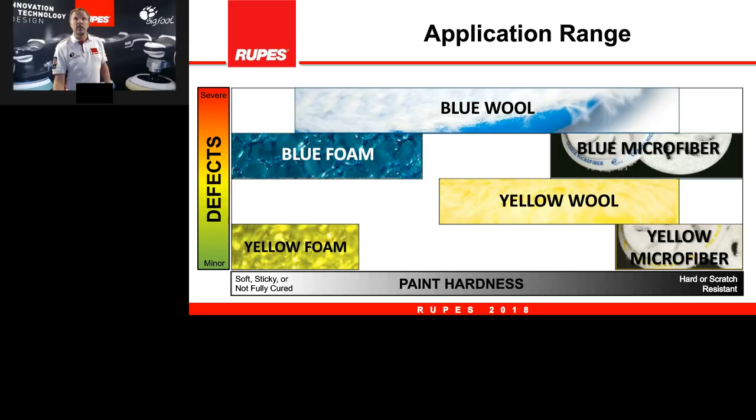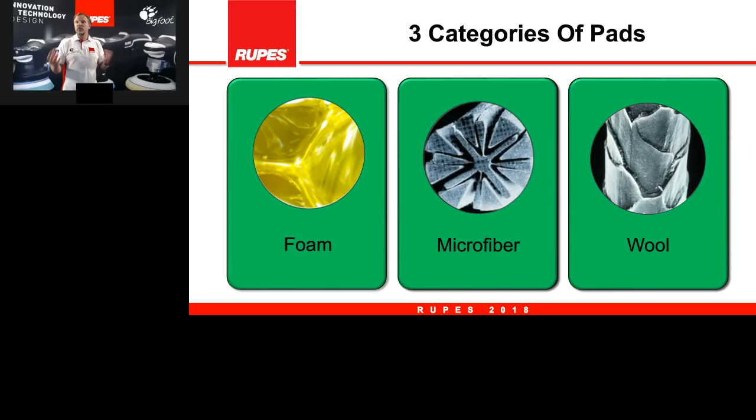So this gives you a visual on pad recommendations based on defects and paint hardness. What we've done at this webinar is cover these three major types of pad materials, and we've gone through a comparison in performance. We've also evaluated very specific situations for each of these materials.

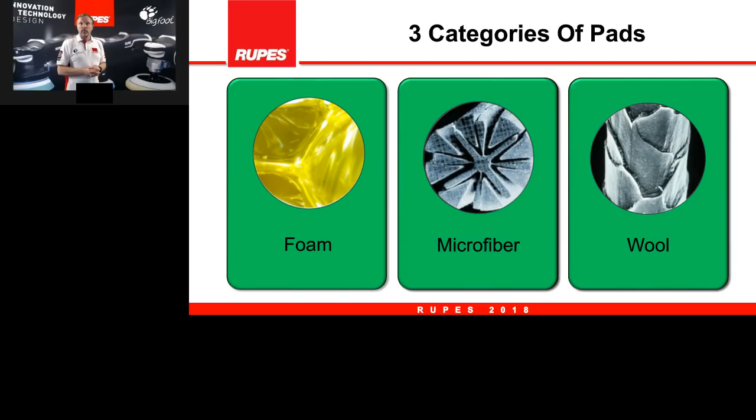We hope this topic was educational and that you learned something about pad use and pad performance, but we also intended to educate on our RUPES pad products. If you want more information...